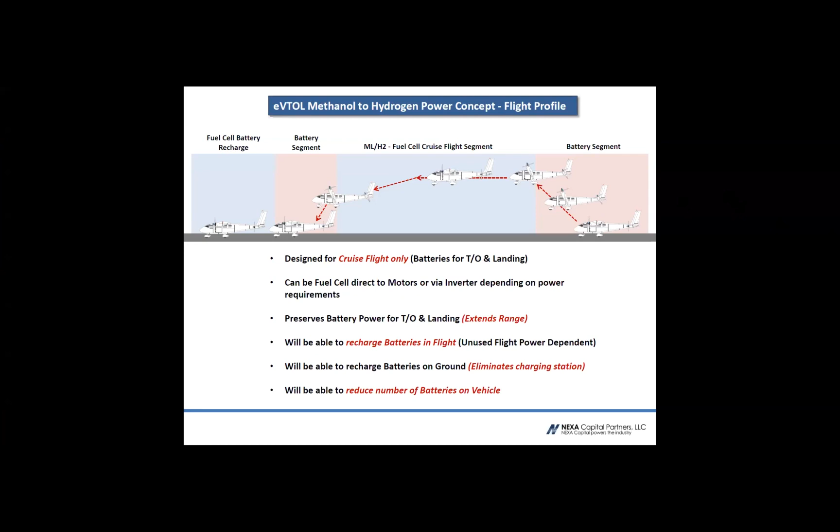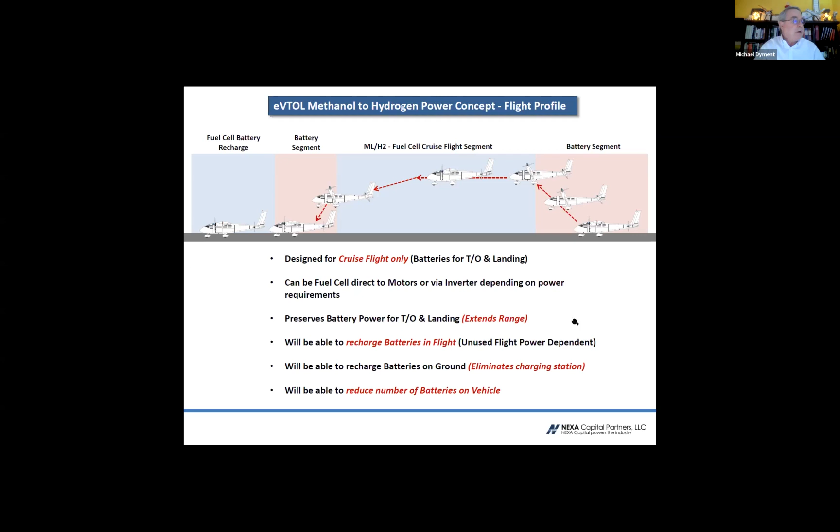Okay, fine. So just very quickly, this Dr. Edlund's paper is going to talk about methanol to hydrogen to energy conversion. The concept behind hybrid flight is that batteries are augmented using power sources that may burn Jet A or may burn hydrogen or methanol. The idea behind these hybrid concepts is that battery power is necessary for takeoff and landing, but the fuel cell can be used to charge the batteries during flight and while parked on the ground. This preserves battery power for takeoff and landing. The capability of these fuel cells will be to also recharge batteries, whether in flight or on the ground, and potentially reduce the number of batteries on the vehicle itself. So there's a trade-off between these various modules. Dr. Edlund is going to be talking about how methanol can be used in a fuel cell configuration that converts to hydrogen and then feeds through the hydrogen-to-electrical charging process directly to engines or motors and indirectly to batteries.

What's interesting about methanol is that it's a ubiquitous fuel. It's available, generally speaking. It can be regularly tanked and treated like any other fuel, and it can be pumped through pipelines.

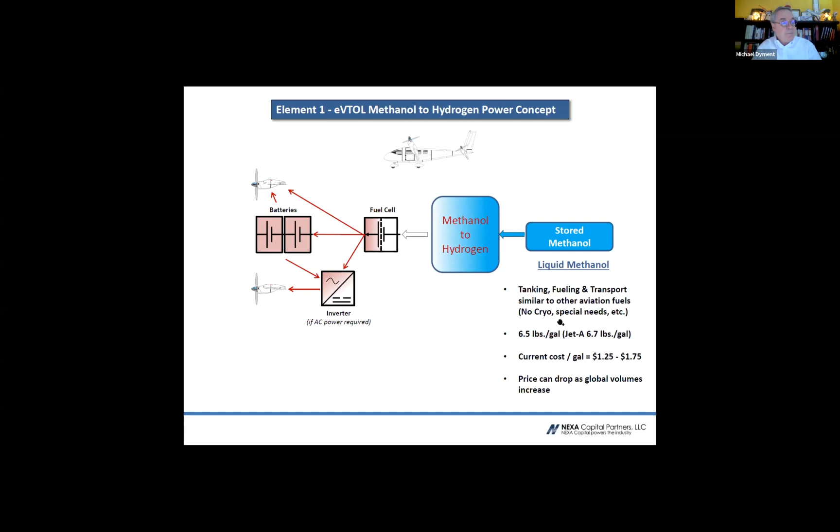Its current cost is in the range of $1.25 to $1.75 a gallon. And lastly, just some other interesting facts that he's going to talk about.

So the point I like to make is that a gallon of methanol has more recoverable hydrogen than an equivalent volume of liquid hydrogen. So you want to think about that. And so we're not burning methanol, we are converting methanol, and this is what permits the energy density properties that we are seeking in eVTOL flight.

So methanol is safe to transport, store, and use. It's available now, it's widely available. You can even buy methanol on Amazon or eBay. And the production of methanol is increasingly being made from biomass and from renewable energy. So some of the graphics here illustrate the fact that there's a methanol market, and the discussion that will follow here is going to inform us about the benefits of this capability.

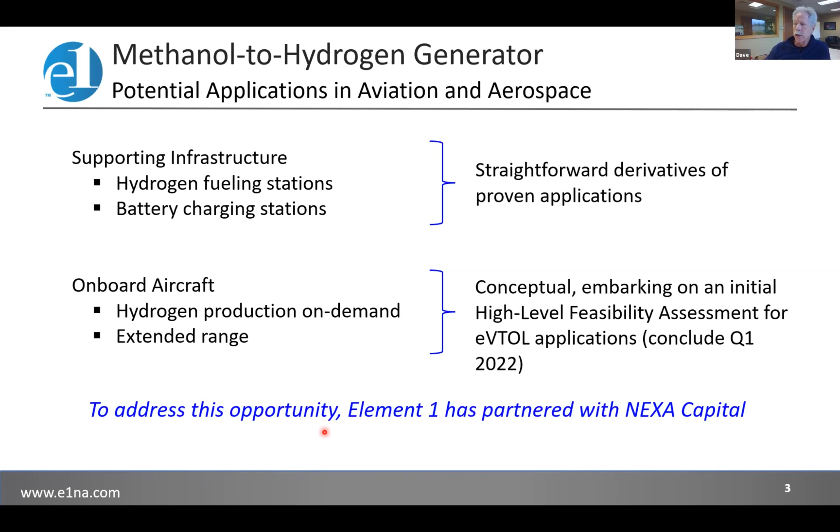And we welcome comments and participation from others in this community as we get into this high-level feasibility study. So the presentation is organized according to this outline. I'll provide a short introduction to Element One. I do want to spend some time talking about renewable methanol, explain what it is, why it has a low carbon footprint. And the question invariably comes up when discussing renewable methanol: well, what about renewable hydrogen? So I'll provide a few slides on that. I won't spend a whole lot of time there, but again, we can come back during Q&A if there's interest.

The economics are extremely important, so I'll show how that works with methanol. And then, unique to methanol as a feedstock for hydrogen, we have the option to drive carbon emissions into the negative range and even strongly negative range.

And that presents a lot of very interesting business opportunities. And then finally, I'll wrap up with conclusions.

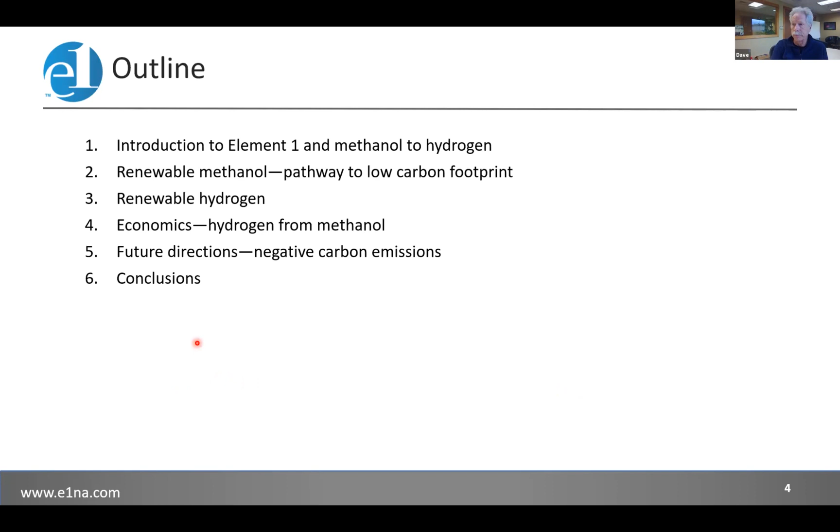Element One is an independently owned company. We were founded in 2010. We're located in Bend, Oregon in the Pacific Northwest. Our business model is technology development and licensing. We do have licensing partners, and we also have joint venture partners where we have an equity stake in the joint venture in lieu of some or all of future royalty streams. In China, we have a business development office, about a half-hour high-speed train ride south of Shanghai. Currently, we're at 22 full-time persons, and we do all of our technology development in Oregon.

So a little bit about methanol. Methanol, as Michael pointed out, is a wonderful hydrogen carrier. And it's not just methanol that we're going to be talking about. It's methanol mixed with water. And the reason for that, that I'll show you in a minute, is that water is also a source of the hydrogen that we're going to extract. Now, if we talk about the hydrogen content of methanol, we're really not looking at the entire energy content of methanol. We're ignoring energy that comes from carbon in the methanol, only focused on hydrogen. And that's where we're using this term called hydrogen equivalence.

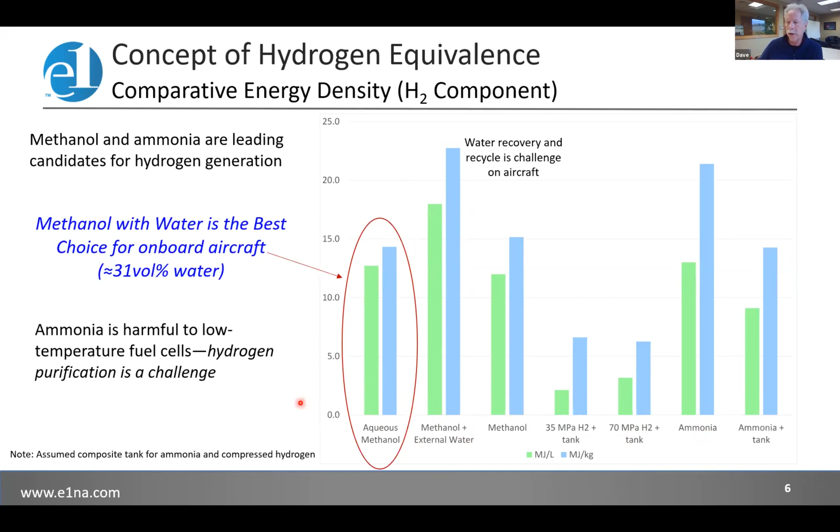So then, what is the chemistry that we're dealing with? Methanol is a very simple molecule, the simplest alcohol. It has one carbon atom in it. And when we react that methanol with water, we can get up to 3 equivalents of hydrogen from each equivalent of methanol and water. 1/3 of that product hydrogen comes from the water.

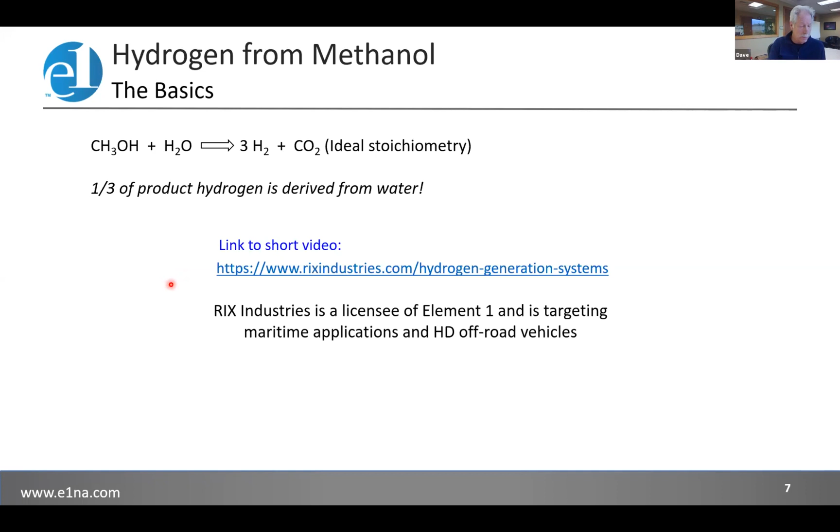Now, I'm not going to go to it right now, but one of our licensing partners, RIX Industries, has put together, I think it's a 3-minute video that describes this process, and I'd encourage you to go to their website and take a look at it if you want to get a better idea of how this all works in a machine.

Characteristically, there is no SOx pollution, no NOx, no particulate matter. Because carbon monoxide is a byproduct, we do have to purify the hydrogen to use it with a PEM fuel cell. We do that with a proprietary membrane process, and we get ISO 14687 grade hydrogen, which is suitable for use in fuel cells.

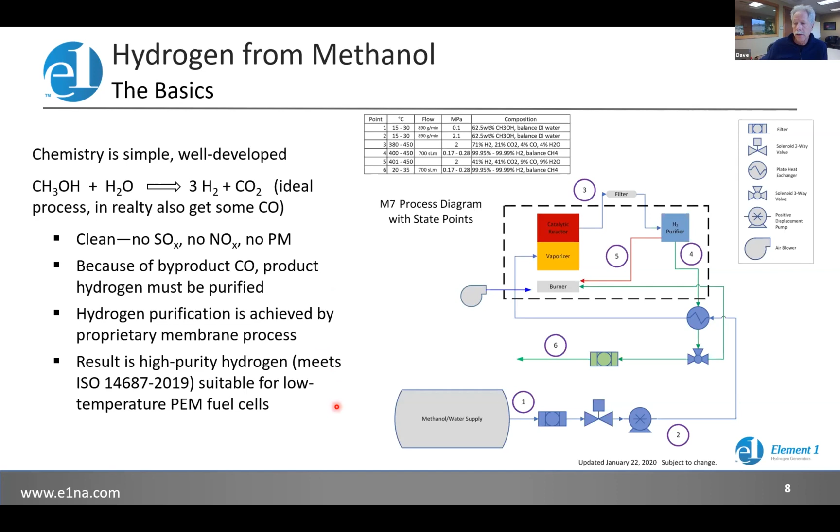The capability of generating hydrogen can be applied either on board a vehicle, and in that case we're talking about extended range. So when we look at land-based vehicles, the answer is extended range, much further driving range than you can get with compressed hydrogen. And the same would be true for aircraft. And then fast and easy refueling, which goes a long way to overcome the challenge of compressed hydrogen fueling infrastructure.

We can also look at using these machines as land-based hydrogen fueling stations. I'll talk a little bit about that when I get to the topic of renewable hydrogen. And then a third option is you use a hydrogen generator in conjunction with a fuel cell in either a stationary or mobile platform to produce electricity for a charging station. And in doing that, you overcome all of the bottleneck in the grid.

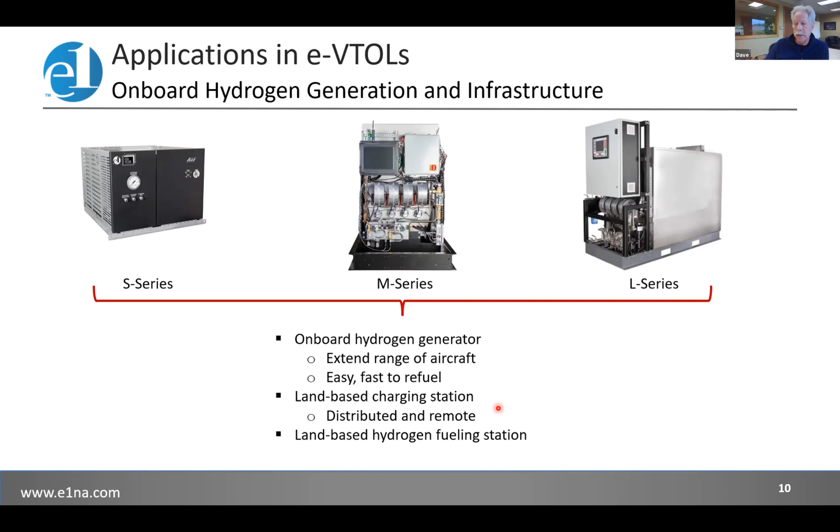Here's an example of a project we did last year in China. This is a medium-duty truck made by FAW. In this space, in this cabinet behind the cab, one would normally find 8 cylinders to store compressed hydrogen. The fuel cell in this truck is made by Refire under license from Ballard. And here you see that the hydrogen generator occupies a little over half of that space. So the physical volume required by the hydrogen generator for extended range transportation is less than the volume required to store compressed hydrogen.

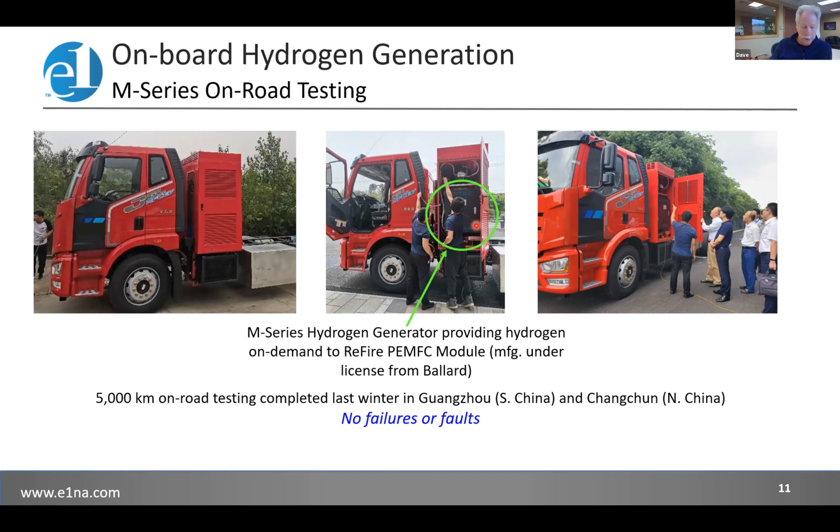Now I'm going to switch to renewable methanol. It's not a new concept, and there are commercial plants that I'll talk about in a minute.

The whole principle of renewable methanol is that it follows from mimicking the natural carbon cycle. You probably recall seeing this in science classes, beginning science classes. CO2 enters the atmosphere from decay of organic matter, from byproducts of biologic life, animal life. And then that CO2 from the atmosphere is captured by plants through photosynthesis. So we have this natural cycle of carbon dioxide.

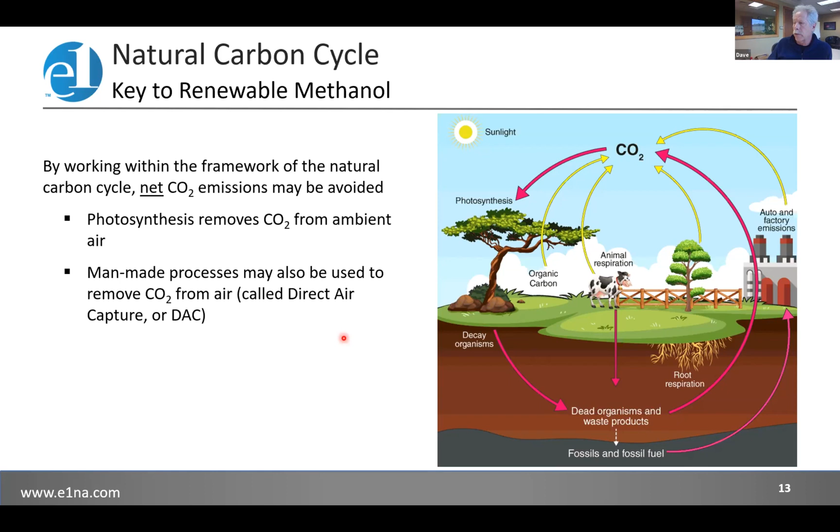And that gets upset when you have man-made activities, human-caused activities, such as emissions from burning fossil fuel. But we can think about a completely synthetic route, a human-derived route that mimics the CO2 cycle.

And that's shown here, where we take all of the sources of greenhouse gas emissions, which is primarily CO2, but not only CO2. That's emissions from landfill sites, degrading plant life, burning of fossil fuels, and of course byproducts from animals and humans, waste. These sources, which also include methane, by the way, and methane, of course, is an even stronger greenhouse gas than CO2.

But we can take these emissions and through chemical processes, convert that CO2 and methane into methanol. So think of taking these emissions and sequestering those greenhouse gases in methanol. Now, if the methanol is burned or otherwise converted to CO2, that emission comes back to the environment, but in the form of CO2. The methane emission is totally avoided. And that's a very powerful step in achieving a very low carbon intensity.

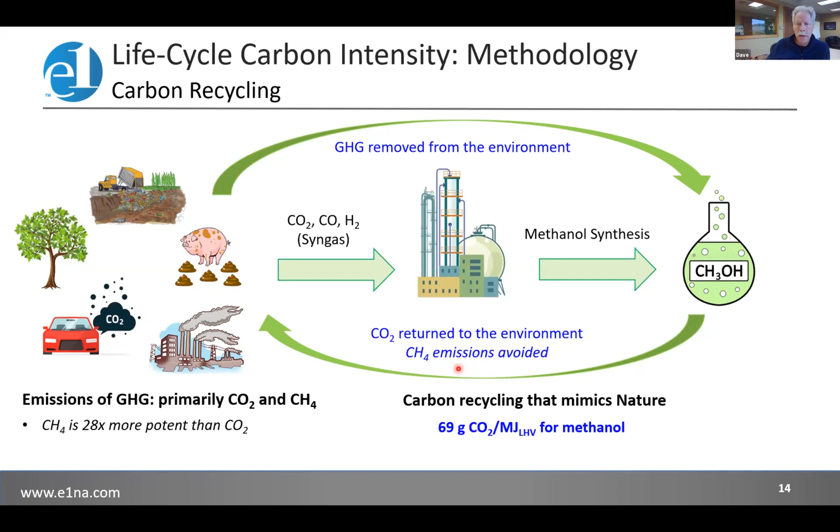So here's an example that's in practice today. This is the biogenic carbon pathway, where we take waste gases from decaying organic matter, animal waste, human waste, or maybe even landfill waste. And we add energy in the form of heat and electricity to convert that waste to methanol.

The methanol then, with water, is converted to pure hydrogen. That pure hydrogen can make energy in a fuel cell. It could also be burned in an engine if you're so inclined. In that process, you release 69 grams of CO2 per megajoule of energy. That's the same amount of greenhouse gas that we've removed from the environment in the process of making the methanol. So these two exactly offset each other.

And then that CO2 goes back into the environment where it's cycled, or recycled in this case, through the biogenic pathway. Now, in this example, the only net greenhouse gas emissions are from the source of energy that's used to convert the feedstock into methanol.

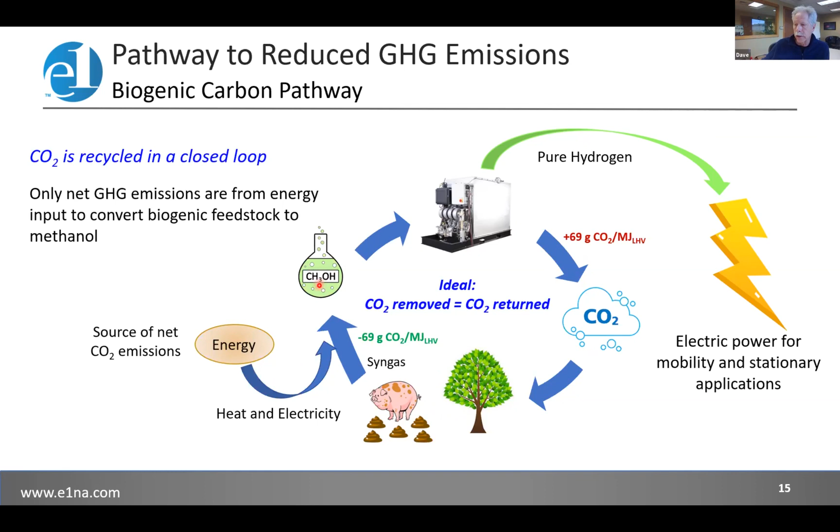Now, a second pathway, which more directly mimics the natural carbon cycle, is where we capture CO2 either from the atmosphere, that would be called direct air capture, or from industrial processes. And in the case of industrial processes, this has been under commercial production in Iceland, I think for more than a decade now, the oldest renewable methanol plant globally.

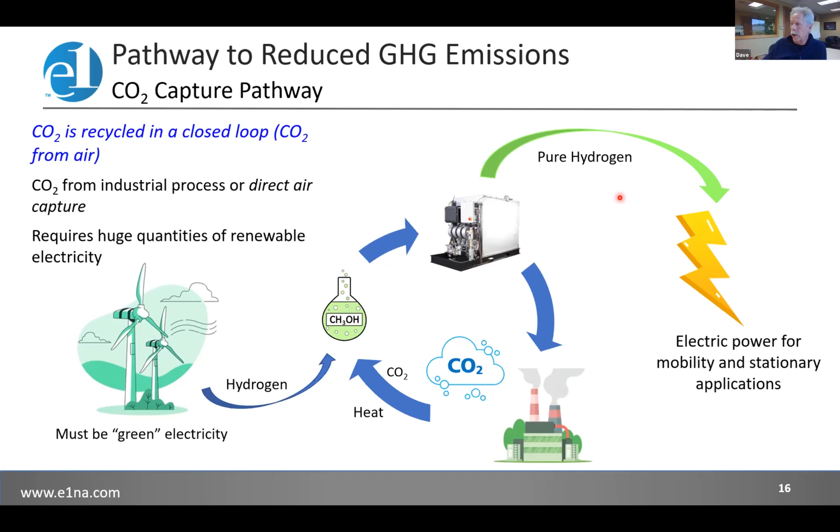So the idea is that we take green electricity to make hydrogen. That hydrogen is combined with CO2, either through direct air capture or from industrial byproducts. The CO2 is sequestered in methanol, and then again we go through this cycle of converting the methanol with water to hydrogen and releasing the CO2 back to the atmosphere.

In fact, the emissions or carbon intensity come from fossil fuels. If we take renewable electricity instead—hydro, wind, PV—we can get to very low carbon intensity in making that methanol.

If we use biogenic sources like municipal solid waste from landfills, biomass, or other forms of organic waste, or animal manure—and I'd add sewage sludge left over from waste treatment plants at big cities fits here too—you can get into low to even strongly negative numbers. The reason you get negative numbers is the avoidance of methane emissions, methane being 28 times more potent a greenhouse gas than carbon dioxide.

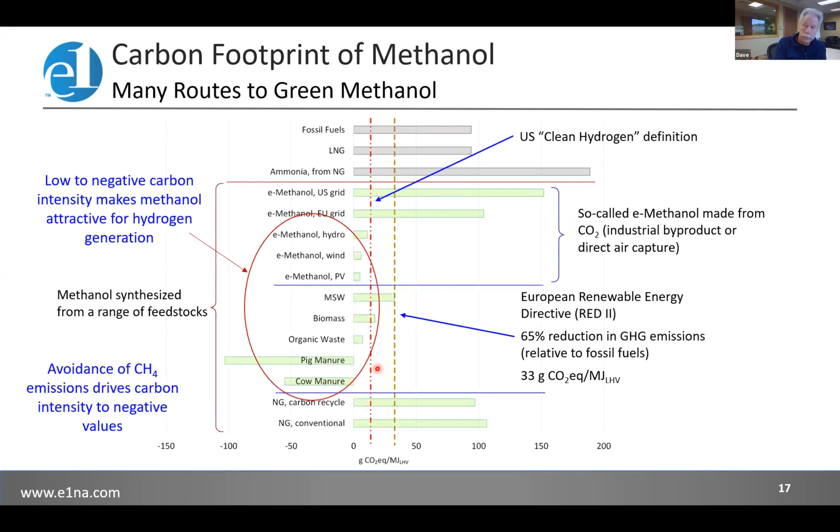So renewable methanol is not just a concept, it's reality. In Iceland, we have the Carbon Recycling International plant, which has been operating for about a decade. There, CO2 is captured from a factory in the background, and using electricity made from geothermal energy—which they have a lot of in Iceland—they make renewable methanol and export it for different functions.

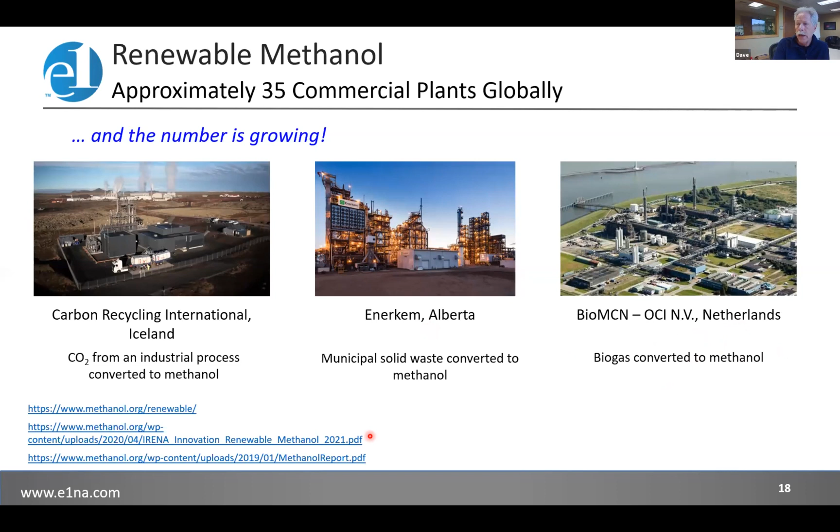There are about 35 commercial renewable methanol plants operating globally now, and many more either on the drawing board or under construction. So briefly, let me contrast renewable methanol with green or renewable hydrogen.

First, renewable hydrogen is generally made by electrolysis of water. It's a very energy intensive process where you'd put 50 or 55 kilowatt hours of electricity to work splitting water to get 1 kilogram of hydrogen. That's shown here in this diagram with the three lightning bolts going into converting water into hydrogen. That process is about 66% efficient at the moment.

The hydrogen is then compressed or liquefied and distributed, where it's converted in a fuel cell at about 55% efficiency. So you end up with overall 3 units of electricity beginning the process to get 1 unit of electricity coming out at the end. Overall, it's not very energy efficient.

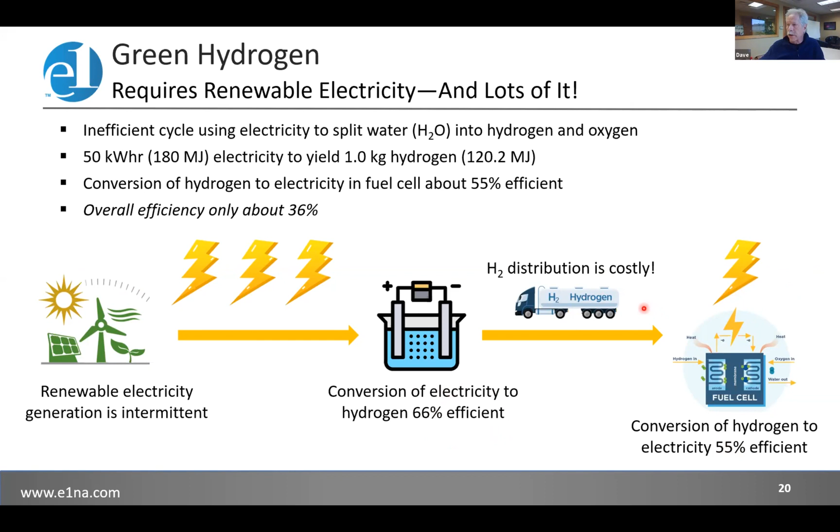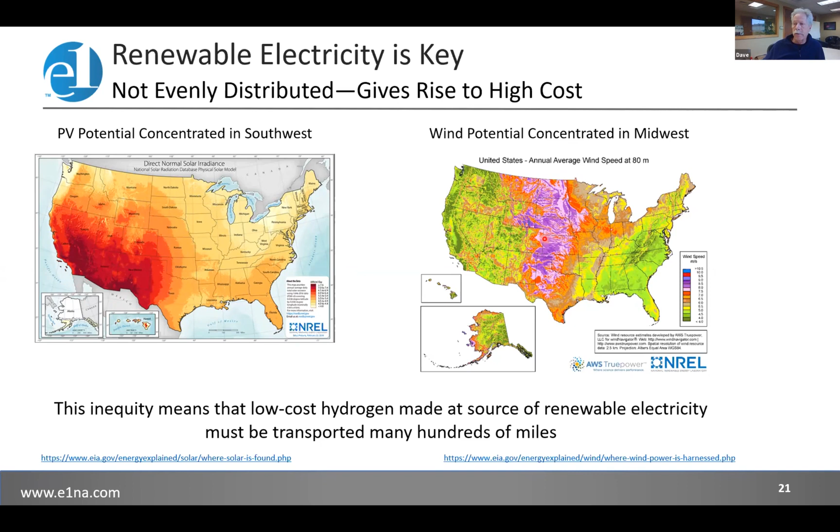But the big challenge to overcome is in the distribution of compressed hydrogen. If you look at renewable sources of electricity in the United States—and this is true for any region of the world—you'll find those resources are not evenly distributed. PV in the US is mostly focused in the Southwest, wind mostly in the Midwest. That means if you use that renewable energy to make hydrogen, you're faced with the challenge of moving that hydrogen, in some cases, long distances.

So hydrogen, for the most part, is moved by truck. In the case of compressed hydrogen, it's moved in what's called a tube trailer. Here you see a photograph of one—this trailer hauls 300 kilograms of hydrogen.

Now, if you look at moving methanol as a carrier for hydrogen, methanol is a liquid. It does not need to be compressed, so you can use normal fuel tankers like this Chevron tanker. This truck would haul 43,900 liters of methanol, which is enough to make hydrogen to fill 21 of these tube trailers.

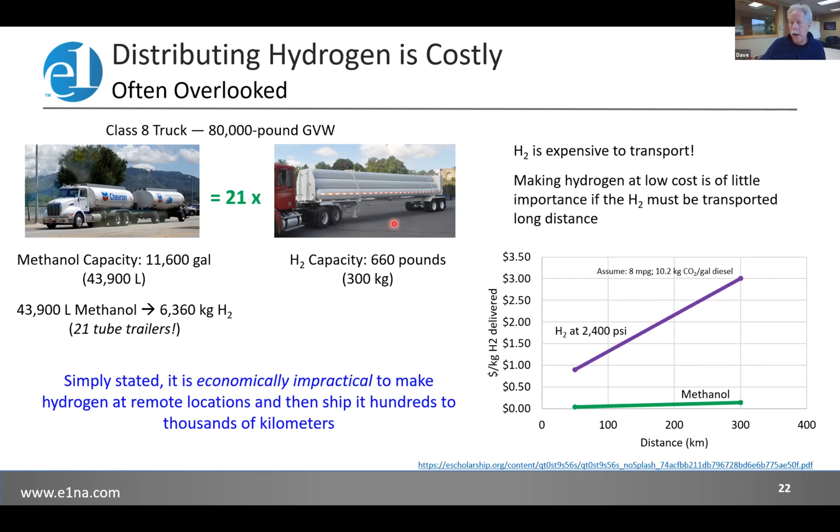And that really is the message here: using methanol as a carrier for hydrogen, being a liquid under normal conditions, means it's very easily transported in large volume at low cost. Hydrogen is challenged to do that. In this slide, the yellow portion of this bar graph shows the greenhouse gas emissions associated with moving that hydrogen by truck 300 kilometers.

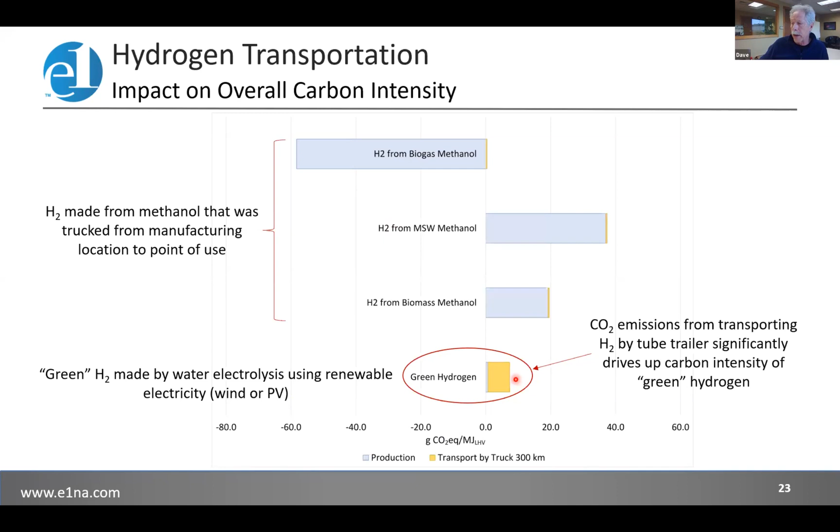Now, the economics of methanol. Being green is great, but it also has to be affordable.

And we can do this process and recover hydrogen, fuel cell grade hydrogen, at 84% energy efficiency. The reason we can do that is because we take the byproduct gases, CO principally being one of those, and burn that to get energy. CO is actually a pretty good fuel. The result is that 6.9 kilograms of methanol yields 1 kilogram of hydrogen.

At $500 per metric ton for the cost of methanol, which is about where we are at the moment, you generate hydrogen at $3.45 per kilogram based on the cost of the methanol. Yes, we have to add deionized water to that, but that's a negligible cost. And the addition of maintenance is also minimal to negligible. So it's comfortable to say that we can produce hydrogen for about $3.50 per kilogram from methanol at current pricing.

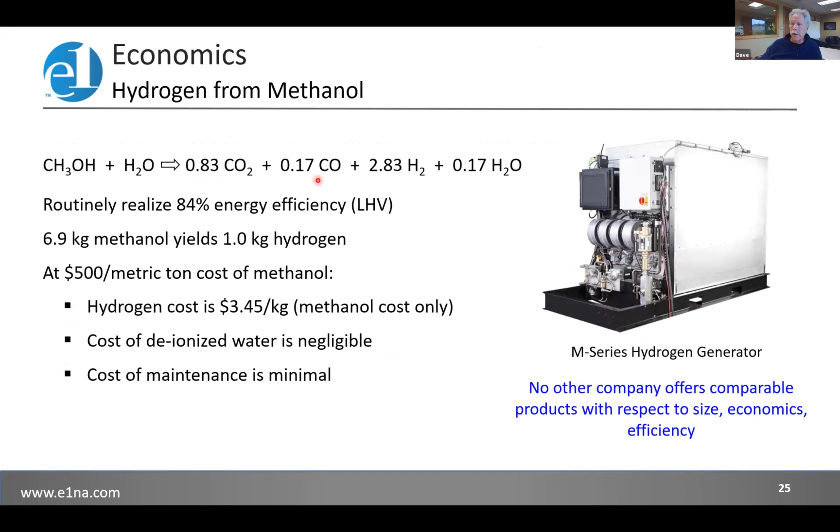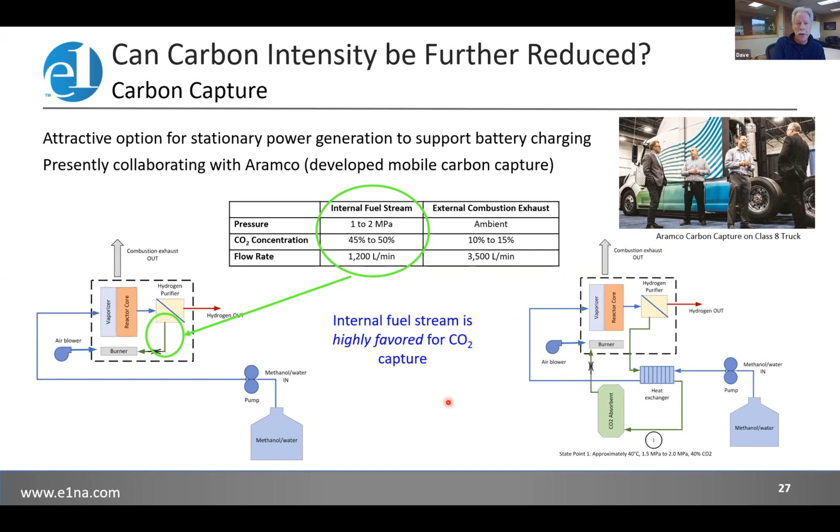Aramco has developed small-scale and mobile carbon capture technology that was demonstrated on a Class 8 truck. Here you can see that chemical process for capturing the CO2 fits behind the cab. We think this is very attractive for marine and for other stationary applications like hydrogen generation for fueling and electric power generation for stationary applications, including battery charging.

If you invoke even partial CO2 capture, and for this exercise, we've invoked 40% CO2 capture. That's what we're aiming for in the preliminary engineering analysis with Aramco. And it looks like we can do that relatively easily.

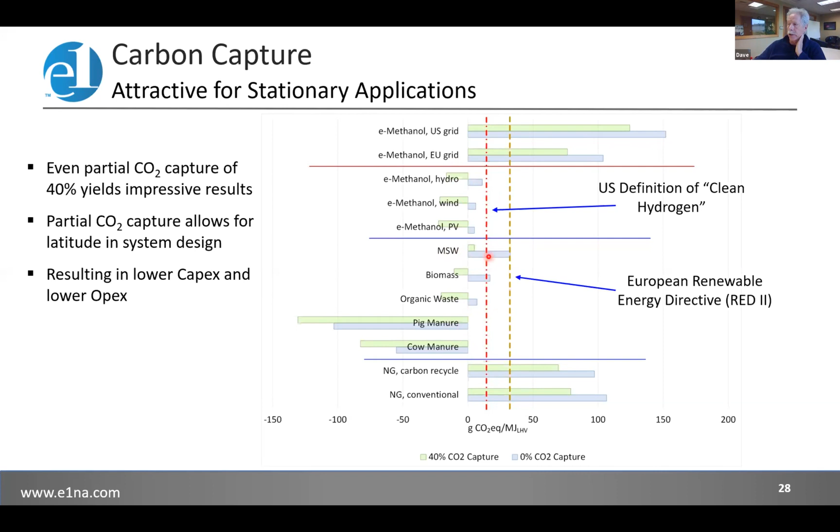Onboard aircraft is the home run: a hydrogen generator combined with a fuel cell, where the hydrogen generator converts liquid methanol and water on demand into hydrogen, which is used by the fuel cell to make electricity. We think this is extremely attractive, but a lot of engineering work needs to be done here. We're inviting participation from OEMs and component manufacturers in this space, and we'd love this to be a strong collaborative exercise.

Easier to do would be battery charging stations. These can be thought of as fixed assets built into an airport, or as mobile assets—think of a truck or trailer that can be moved from one point to another. The product is electricity, hundreds of kilowatts of electricity for rapid battery charging.

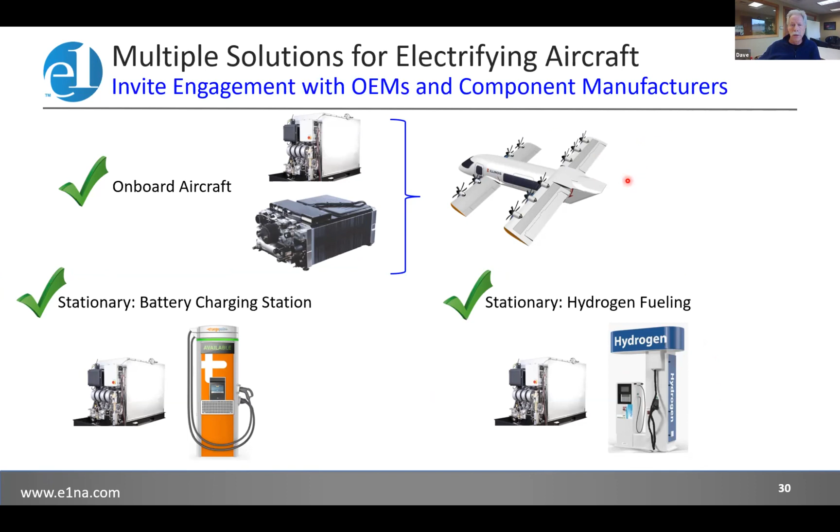The low-hanging fruit is in solving the infrastructure challenge, but the highest value of the IP would probably be realized through on-demand, on-aircraft hydrogen generation. And to that point, we put together this power diagram.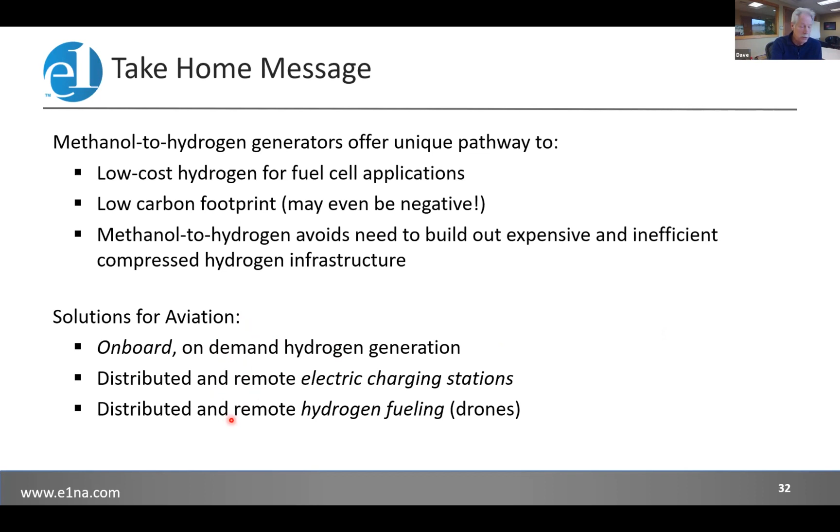And that brings me to the conclusion. As I mentioned, Element One and Nexa Capital are partnering to explore these opportunities, and we encourage participation from others in this space. Please feel free to reach out to myself or to Michael Dyment at Nexa if you have any questions or want to expand the discussions. Thank you.

Thank you very much, Dave. Extremely interesting—there are a number of questions in the chat box. I am going to call on Bruce Holmes, our resident hydrogen guy. Bruce, you've put several questions into the chat box. Would you mind coming online and asking what you'd like to ask here? Yeah, thank you very much, Dave.

You've highlighted quite a few factors that can be very interesting. Obviously, you said there's some assembly required, batteries not included, work ahead. And if my takeaway is correct on the last graphic presentation of data that you showed, what I would conclude is that using on-demand gaseous hydrogen production in an onboard H2 generator, in this graph, and like I said, I'm trying to get my head around all the numbers. It takes me a while to do that.

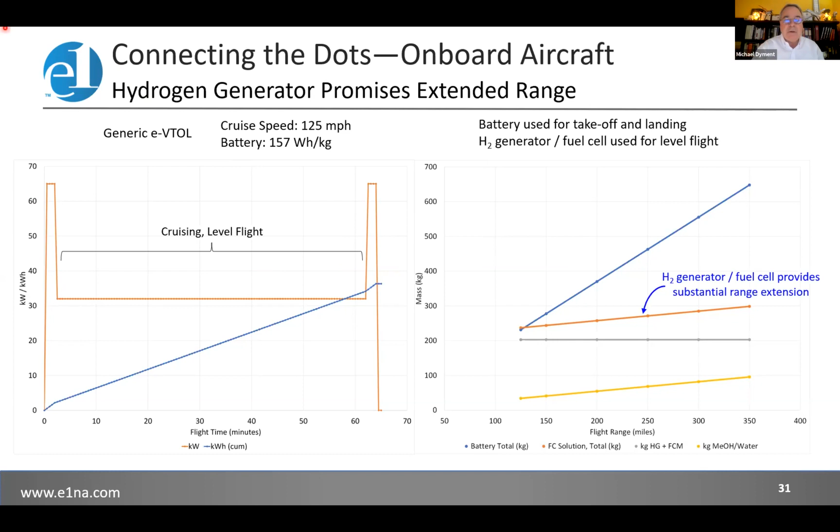Well, we have two other items on the agenda for this call, we have 15 minutes or so. I wanted to let the members of the council know that there's been a lot of legislation and bills passed or being passed into law, including the most important one, the Biden administration's Infrastructure Investment and Jobs Act, HR 3684.

We've been able to go into that 2,702-page bill to extract some very interesting findings about hydrogen and its potential future evolution. We'll be distributing a 2-page memo on this to the members of the council. By way of summary, we found that in this bill, hydrogen was mentioned 178 times. I'd love to contrast that with the other topic everybody favors.

That has to do with charging stations that would not necessarily rely on hydrogen, but maybe just the grid. Hydrogen outstripped the attention given in this bill by about 2 to 1. The memo we'll send around will point to the fact that there's about $65 billion in funds for grid reliability and resiliency dealing with key technologies like carbon capture, and hydrogen is specifically identified and targeted. The bill provides almost $10 billion for clean hydrogen research and development programs.